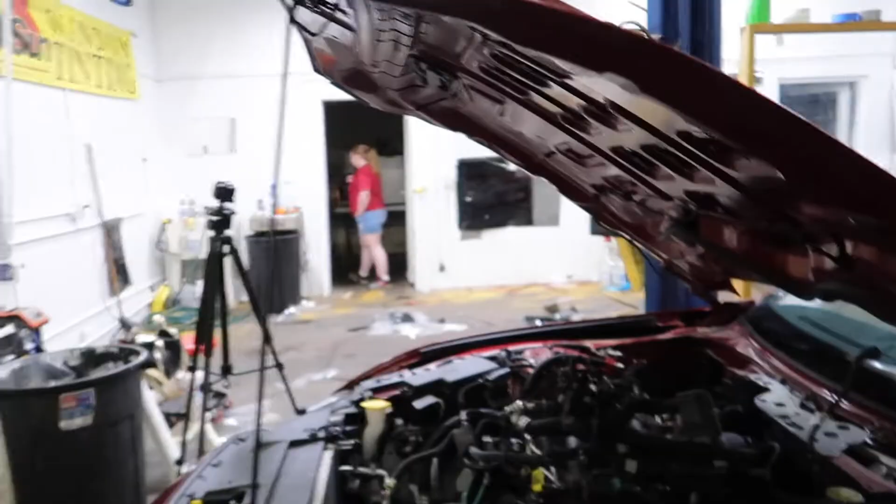Today we are going to be installing a Comp stage 2 cam, oil pump gears, and crank sprocket in this 18 GT. Now this is the same procedure for 2018 to 2020 Mustang GTs. So I've spared you guys the boredom of showing you me ripping everything off the engine, the timing cover, the valve covers, so forth, and I've got down to the nitty-gritty stuff.

So guys, I know I have a Gen 2 timing procedure video with oil pump gears in that, but this is Gen 3, so since I'm doing cams, I'm going to cover the timing procedure, oil pump gears, and cam install in this one video. As I go along, I will be throwing pictures up of torque sequences and things that you need to know, so you can pause the video and reference those pictures from the Ford workshop manual. As you can see, we are ready to start taking the timing chains off.

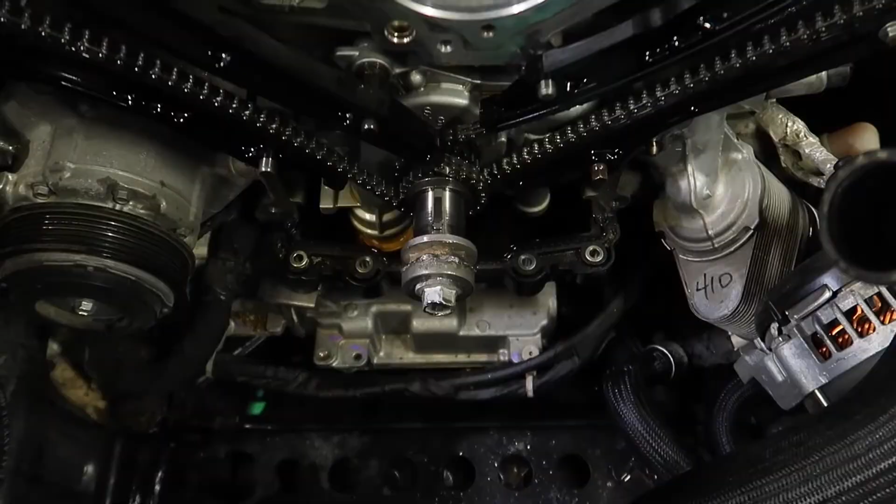Now, timing procedure for a Gen 3 is the exact same as for a Gen 2. As you can see, I've got the crank keyway at 12 o'clock. You want to make sure the R on the passenger side is facing up, because the passenger side is the first timing chain you will take off. So keyway at 12 o'clock, R is straight up. If the R is not straight up, you'll want to rotate the crank one full revolution back to 12 o'clock until you get the R straight up.

So basically, guys, when you have this in the correct position, as you can see, none of the cam lobes are pressing down on any of the valve springs. That ensures that when we take the chain off, nothing's going to bounce around. It's in a neutral position on this side. So we're going to get this tensioner off, get the chains off, and then I will show you what we're going to do to get that side off.

One thing you want to make sure of when you're doing this job is you want a clean surface to put all of your parts that are coming out from the inside of the engine. You do not want to just lay them down and get them dirty. That's very important.

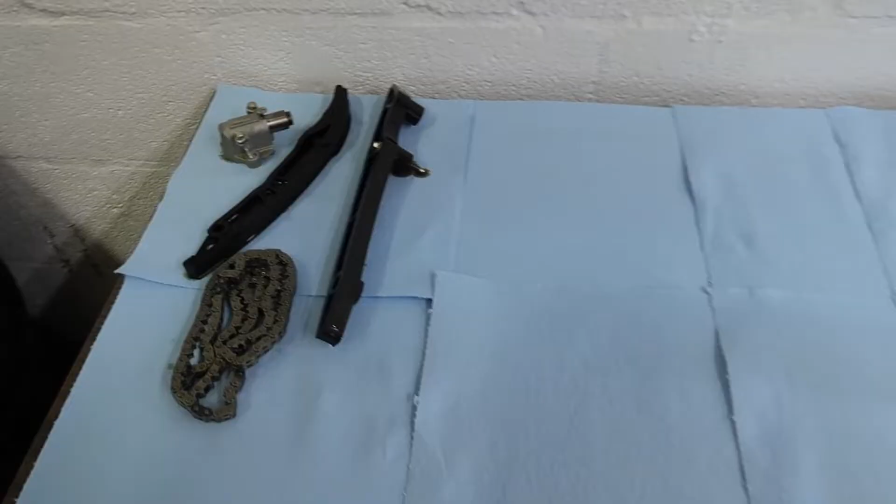As you can see, we've got everything off of this side and we've got it laid out. So when you're facing the car, everything on this side, when I put it on the table, I turn around, everything's on this side, just like I'm sitting in front of the car. You can't really get it backwards, it goes in a certain spot, but I do that so when I'm going back with it, I just grab and go. I don't have to think about it.

Now, right now we've got the keyway at 12 o'clock, so we're going to rotate the crank clockwise to where the keyway is at 5 o'clock. Once you have the keyway at 5 o'clock, you want to look over here, and your L should be, hold on guys, let it focus. Your L should be facing right there, facing away. Now all you're going to do is take the tensioner off, the guides off, and the chain off on this side.

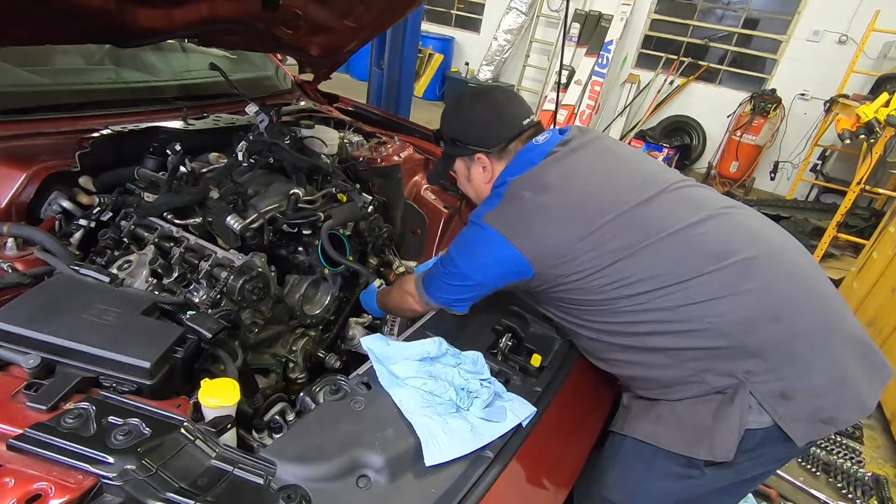Once you get the timing chains off, you'll want to remove the crank sprocket, and in order to get the oil pump off of a Gen 3, you have to lower the oil pan.

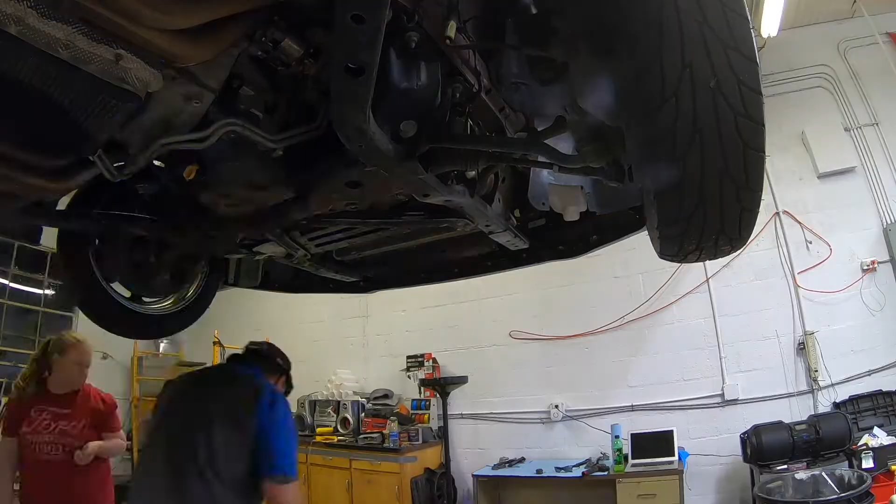Really quick, I just want to show you the troublesome bolts. This bolt right here is sitting right above the steering rack. It can be a pain at times. Take the wiring harness loose, which you have to do anyway to drop the oil pan, pull the little trees out, and then stick the wiring harness up. You can get a wrench up in there, loosen it up, and then walk it out by hand.

And then this one right here, which is hidden right there, you have to put a wrench on that and then get it loose. And I use a stubby ratchet wrench to get it the rest of the way out once I loosen it up.

And then if you take all this cover right here that's on these cars, you can get to this bolt that sits right there pretty easy. But I take the trouble bolts out first, that way the rest of it just goes easy. And of course the front 4 bolts, you remove those when you take the timing cover off. But guys, we're going to get the rest of this pan dropped.

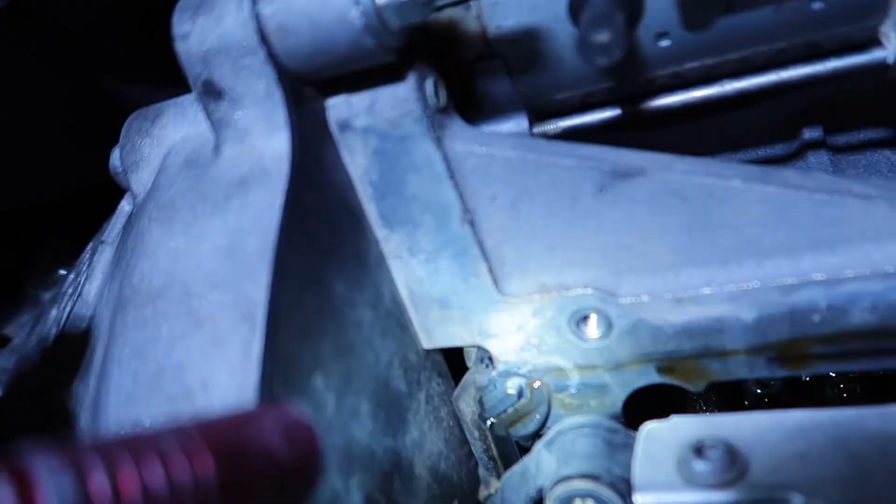Alright, really quick guys, this is what I want to show you back here. That right there is where your silicone's at that I was talking about earlier that you have to remove. You have to be very careful when you're removing that silicone not to let it drop into the oil pan. You have to do that on both sides.

If you see right there, and then you can kind of move the pan back over and you can see it focus. You can see it right there also. And then the silicone on the front, you'll do that when you put the timing cover on. But this right here is what you gotta watch out for.

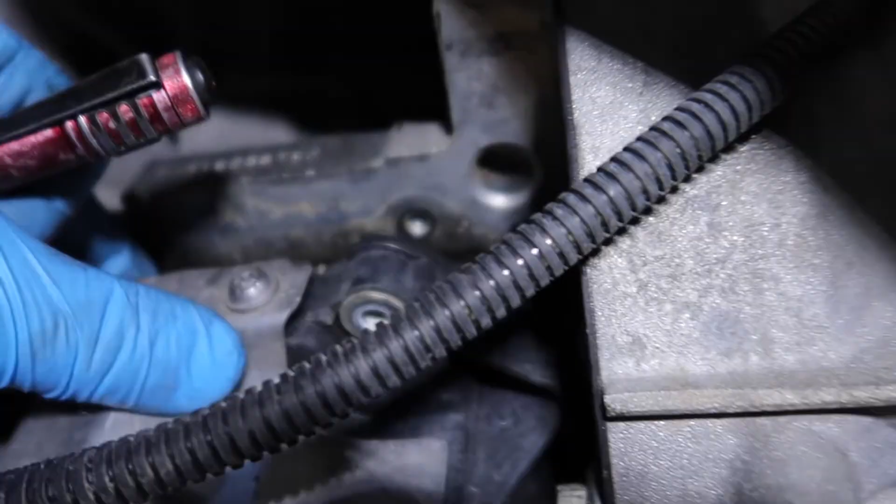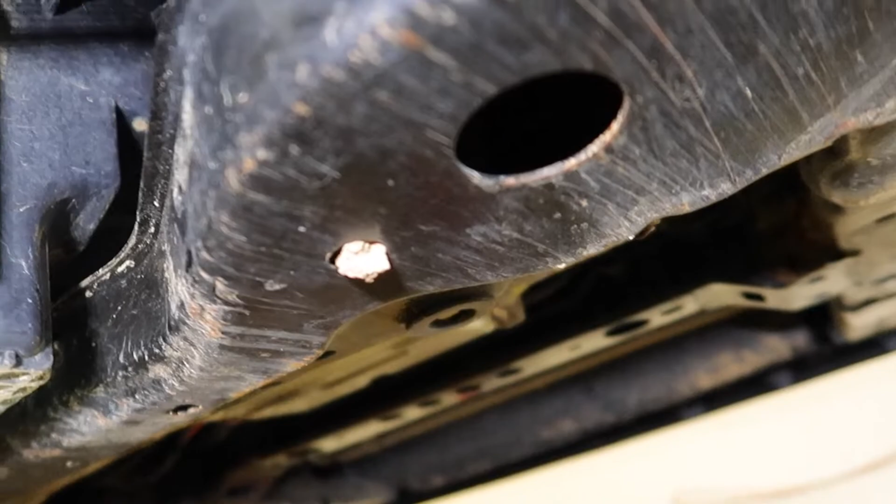Another thing you gotta watch out for, when you pull this down, you gotta make sure that this oil pan gasket stays inside of the oil pan. So you'll just want to take your hand across it and kind of feel and make sure it stays in. But we've got it loose from the oil pump now. We'll lower the car back down and we'll take the oil pump off.

Alright, so as you can see, the oil pan is dropped down far enough to get the pickup tube out of the oil pump. So now all we have to do is remove the 4 bolts to get the oil pump off. So that's what we're going to do right now, guys.

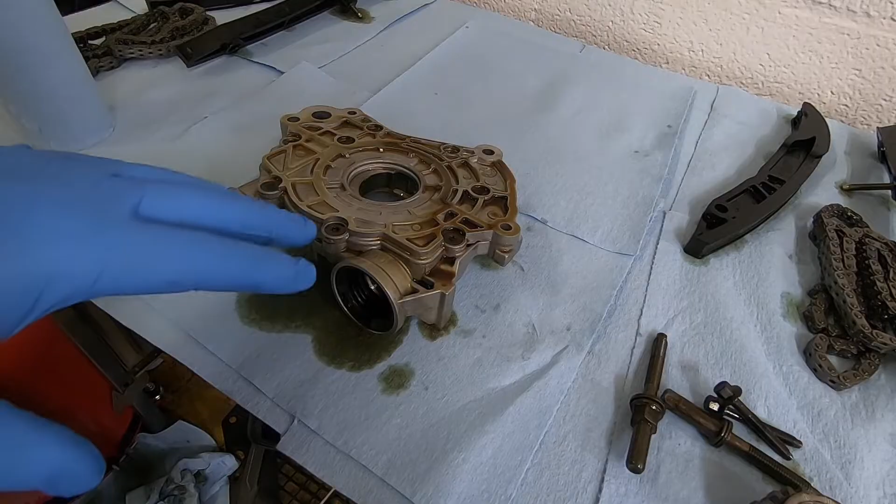Once you have the oil pump out, you want to flip it over. Like I said earlier, you want a clean surface. Put plenty of paper towels on because you do get a little messy with the oil doing this. But you have 8 bolts and they are T30. So you just remove the bolts from the oil pump. Now once I have them all broke loose by hand, I will take a 1/4 inch impact and pull them out.

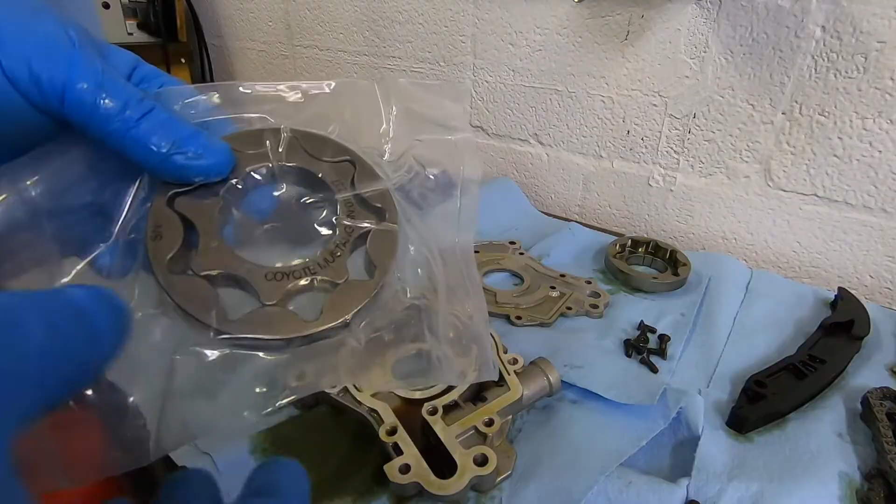Alright guys, so once you have the backing plate off, you have access to the oil pump gears. Remove the center first and then remove the outer part of the gear. So we have the Boundary oil pump gears. I prefer this brand when doing any kind of installations, and one of the reasons is when something is shipped to you, how they ship it says a lot for the company, and they ship it in an airtight package with oil inside of it.

Some of the oil pump gear manufacturers, I'm not gonna name names, will just toss them in a box. They rattle around, and as they rattle around, they can get little nicks on them. Boundary says to install their oil pump gears with the writing facing up as you're installing them. So that's what we're gonna do. So you're going to install the outer gear first.

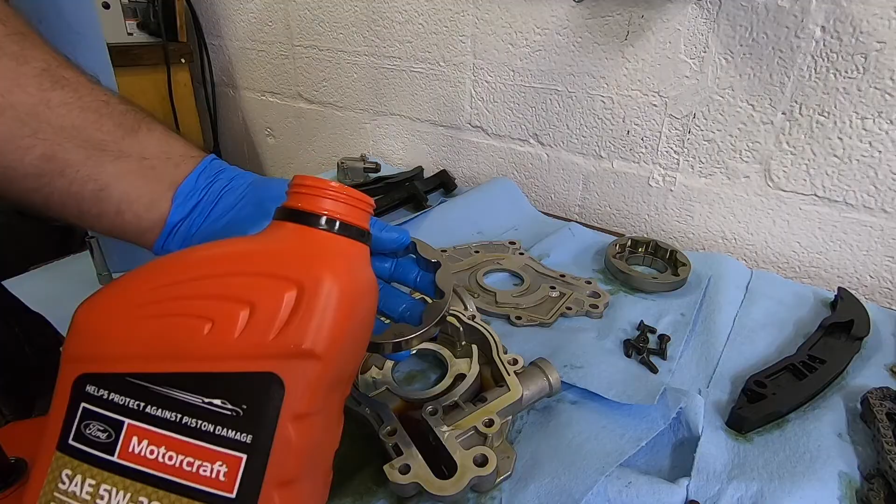Now what I do, guys, this is where it gets a little messy, is I will pour some oil on the gear. You can never have too much oil. I will pour oil on the gear and just a little bit into the pump and then rub it around where I'm going to put the oil pump gears in. You kind of just want to hold it like this and let it drop in. Don't force it in, let it drop in easy, and it should turn very smoothly, just like that, guys.

All right, so then you'll want to put oil on the inner gear. Like I said, just pour oil on it. It's going to get a little messy, but you need plenty of oil, guys. And then you're going to want to set this inside of that gear. Like I said, don't force it. It should go in very easily. Alright, so once that is done, you're going to take the plate and put it right back on.

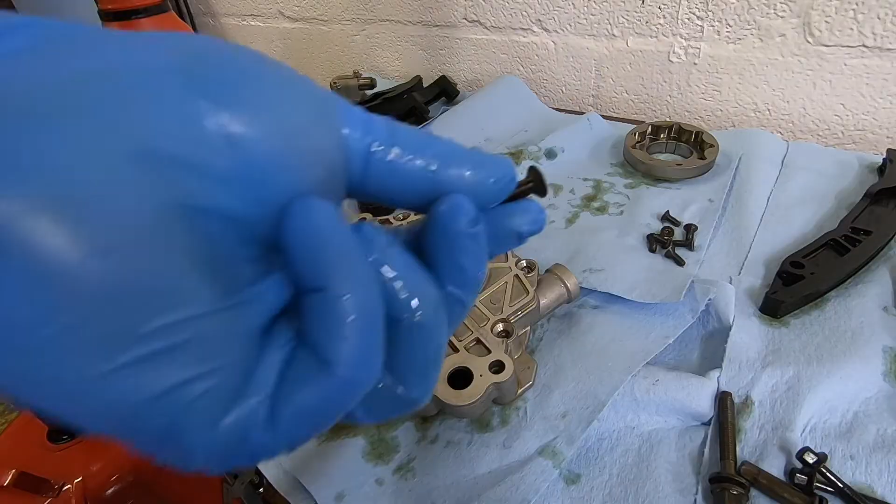Here's what's very important about putting these bolts in. As you can see, these bolts are tapered, and the backing plate is tapered too. If you put one bolt in and tighten it all the way down, you don't give everything time to center. So what I do is put each bolt in by hand and start it. You gotta be very careful, you do not want to cross thread any of these bolts. So start them all by hand and make sure they all thread in nicely.

We're going to start right here, and I'm not going to tighten it down. What I'm doing right now is just bringing it down a little. We're going to let the taper part of the bolts center the backing plate where it needs to be as we start coming down.

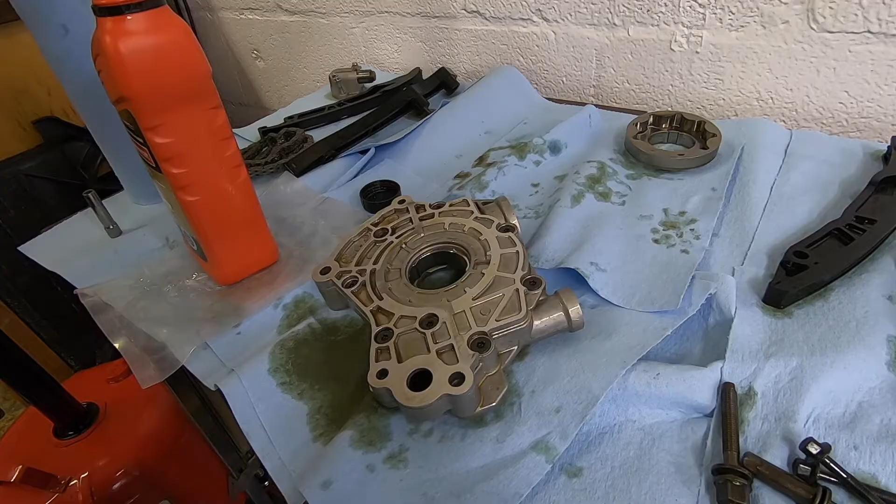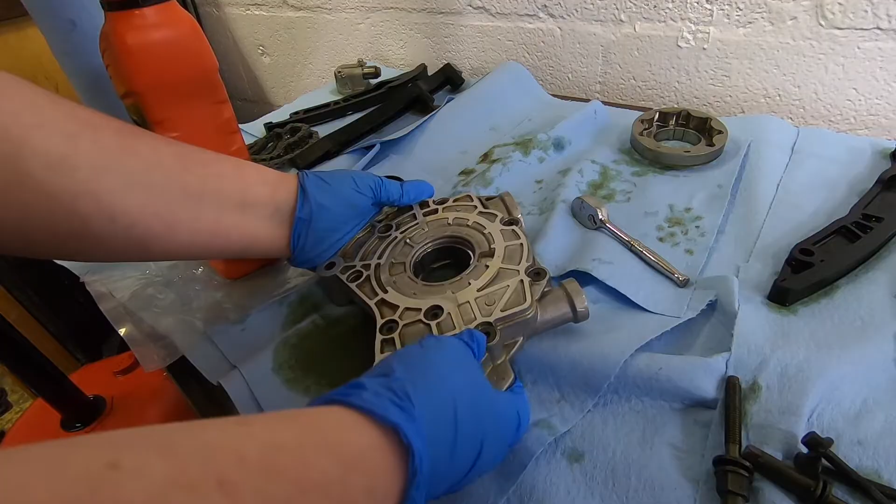Once you get them all snugged up, you'll want to go back and torque them all down to 89 inch-pounds. You might need an assistant to hold the oil pump. I usually like to have somebody hold it, but if you don't have anybody, you can hold it and torque it yourself. It's a lot better if you have somebody help you. So you just torque the oil pump down to 89 inch-pounds.

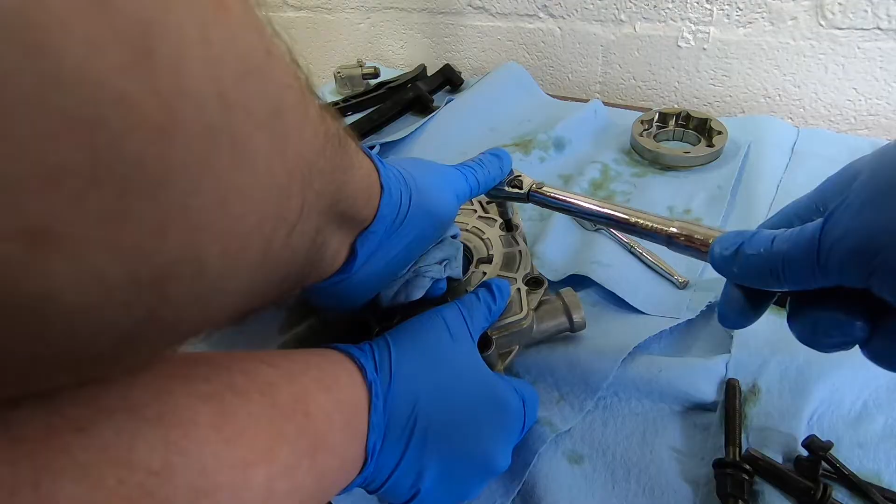As you can see, I'm torquing it down in a star pattern.

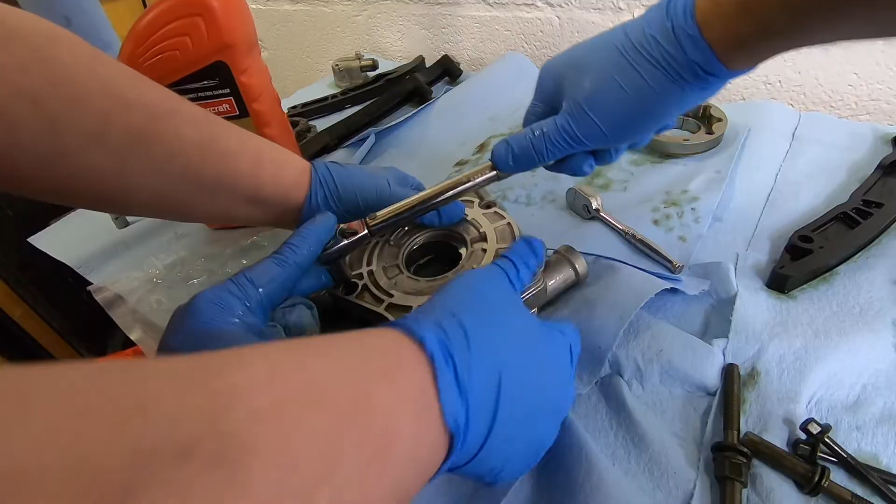Now you just want to go through and make sure you got them all torqued. Once I torque them all down in a star pattern, I'll go back through in order, walking around just to make sure I've got them all torqued and didn't miss one. All right guys, we're good to go.

Now here's the final test. You should be able to take it and rotate it just like that with ease, which as you can see, they're not binding up, everything's rotating very smoothly, and that is what you want.

So now you're going to take it back over and install it onto the car. What you'll want to do when you go onto the crank is line these flat spots with the flat spots on the crank.

So it slides on just like that. All I did was align the slots in the oil pump to match the crank and then slid it right on. Now you'll just install the bolts and torque to sequence.

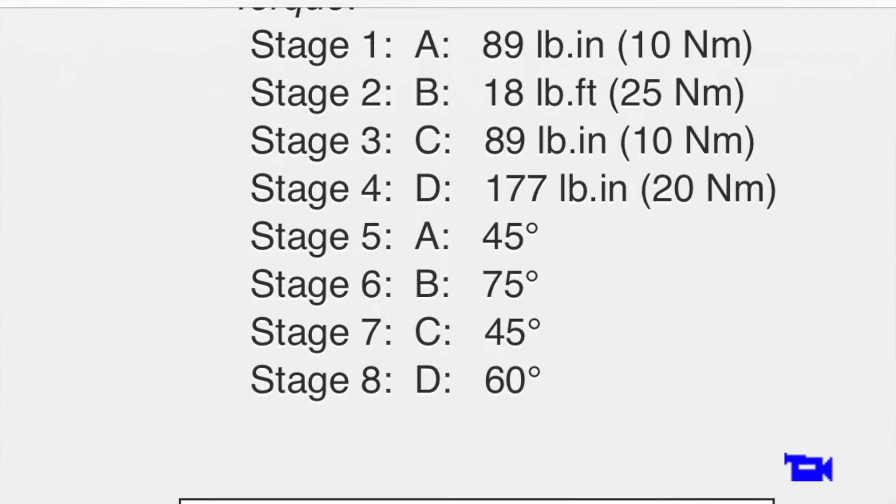I'm going to throw a picture up right here with the torque specs and how to torque it.

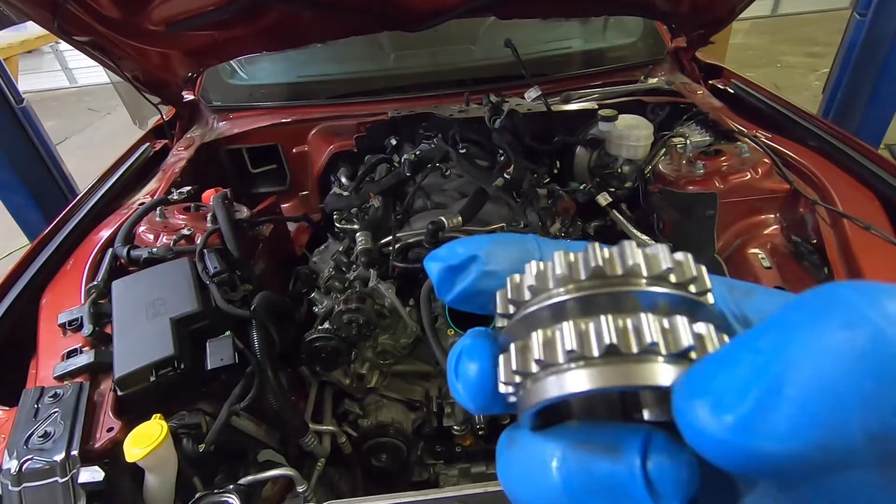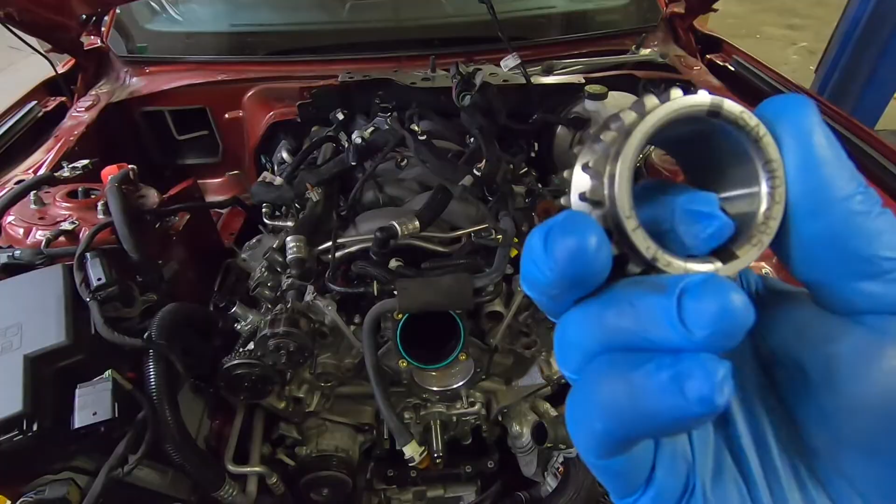On this crank sprocket, you'll want to install it with the lip facing you. Also, another sign of how to install it is the timing mark will be facing you. As you can see, there's no timing mark on that side, but timing mark is on this side. You'll install it with the crank keyway. There's no real way of getting it wrong.

So you'll just rotate it till you find the crank keyway, and sometimes they're tight and sometimes they slide right on like that. If they're tight, don't go taking a hammer or anything else, just give it some persuasion and get it on there, but don't be beating it with the hammer, please.

Once that's on, you're ready to bolt the pan back up. Once we do that, we will be starting on the cam installation, and then we will retime everything.

Here you will want to apply silicone to where you scraped it off before, where I showed you earlier in the video. Just apply silicone back, where the backing plate meets the block and the corners of the oil pan meet up against that.

Really quick before we get started on the cams, the oil pan is bolted back up. Now one thing you've got to make sure of, there's a seal right here for the pickup tube to slide into. You want to make sure you raise the pan evenly and place that just right and push up. You do not need to have it move over here. Gently push up, because if you have it too far over and you push up, you can mess up that seal. So guys, that's an important tip right there.

We are about to get started on the cams. Comp Stage 2 cams use the same procedure as stock cams. You do not have to put springs in, you do not have to limit the phasers. They install just like the factory cams. So we are going to be using the Ford Workshop manual.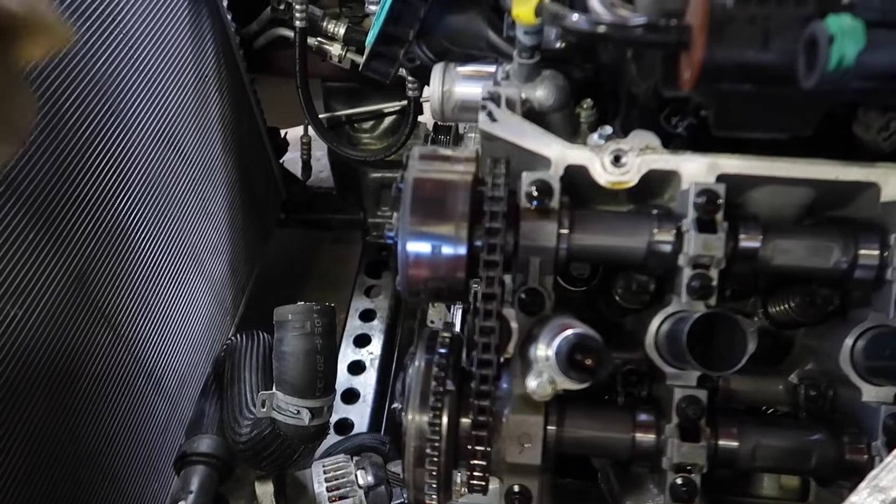Really quick, this is something I do and suggest for everyone: only take apart one side, then put that side back together. Cam caps have an orientation, and you've got to keep them in the exact spot they were. It's very important.

All right guys, first we're going to take these bolts loose. Now if you notice on the cams, there's a squared off spot designed to put a wrench on so you can hold the cams, loosen the bolts, and torque them without the cam moving. One thing you do not want to do is clamp down on it with a pair of pliers or anything like that. Cams do not need to be clamped down on, you use a wrench, and that's what those are made for. Grab hold of it with a wrench and hold it while somebody loosens up these bolts, and you'll do the same when torquing the bolts down.

All right guys, let's get started. We're going to remove the phasers first. You'll want to remove the bolts. Now you are going to replace these bolts, they're torque to yield, and per the factory workshop manual they need to be replaced.

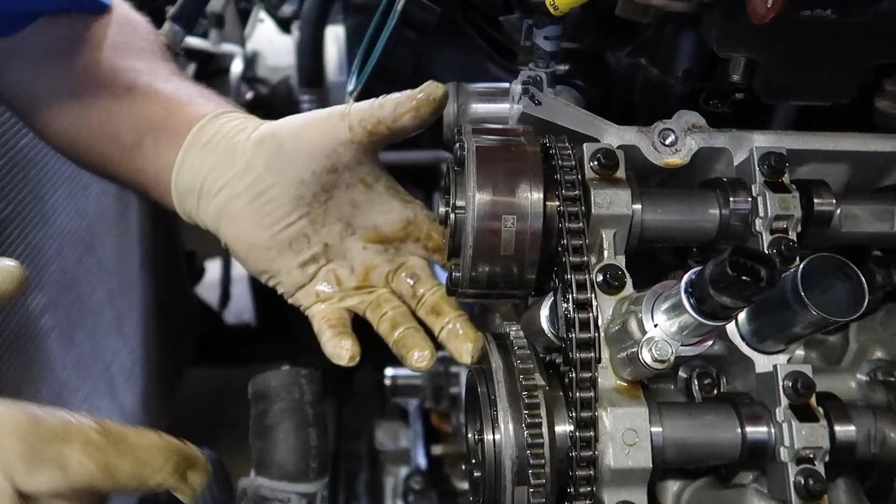Once you remove the bolts, you're going to want to slide this forward just a little, the book says 2 millimeters. All you want to do is get this down and then rotate it 45 degrees.

We're going to take the front cap off first, and then we will remove the rest of them. There is no sequence to removing them per Ford Workshop, but there is a sequence to torquing them. All right guys, so we're going to remove this and then the rest of the cam caps. Very important, you want to keep these in order. This is the intake cam, this is the exhaust cam, and as you see on the front right here, these are made differently.

Somebody asked me, could you get the intake cam and the exhaust mixed up? There is no way to do that. On the Gen 3s, they use totally different phasers, so there's no way to do it wrong. So anyway guys, we're going to remove the front cam cap and the rest of the cam caps, put everything in order, and then remove the cams.

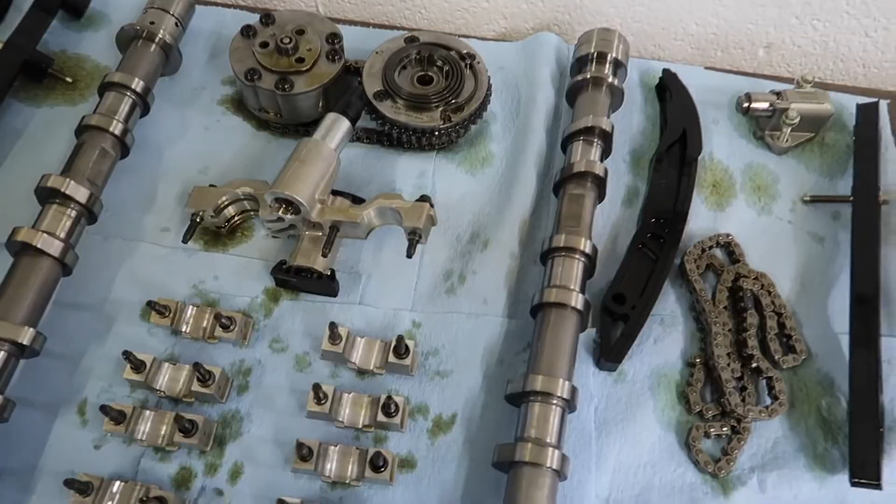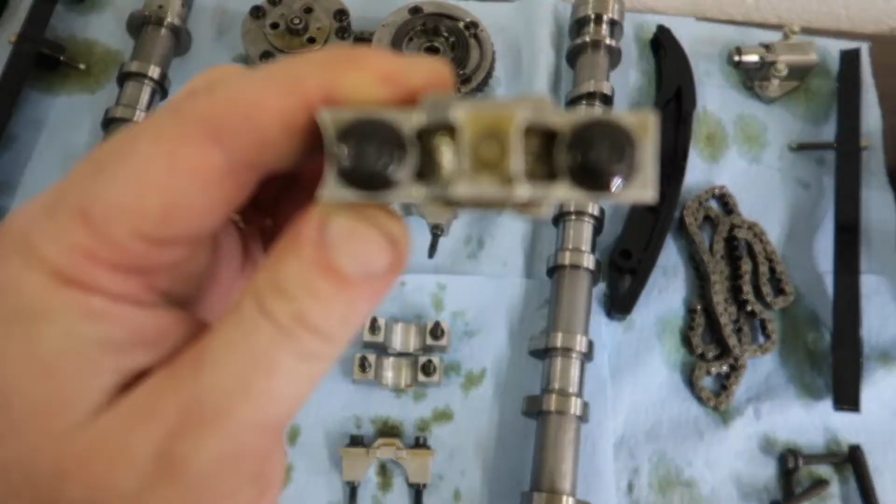Alright, once you have the cams out, as you can see, I've laid them all in order. If you were to put one down and forget where it goes, they are numbered. You see right there it has a 7, with an arrow pointing forward. Starting on the exhaust side, it's 1, 2, 3, 4, 5, 6, 7, 8, 9, 10. So if I was to pick up this one right here, it would have a 10 on it, which it does, and it has an arrow pointing forward, so it would go in as the very last intake cam with the arrow facing toward the front of the engine.

So guys, right now we're going to get the cams unboxed. I'm going to do one cam at a time. I'll put the cam in, then put all the cam caps back and torque everything to spec. Alright, so here are the cams.

Really quick, I want to show you right here, it says right intake, right exhaust, left intake, left exhaust. The only thing that got me at first, you see where it says Focus, left exhaust, on there. It says that on all the boxes, but the specs are different on the boxes, and it actually has RI, LI, LE, RE, so you cannot get them wrong.

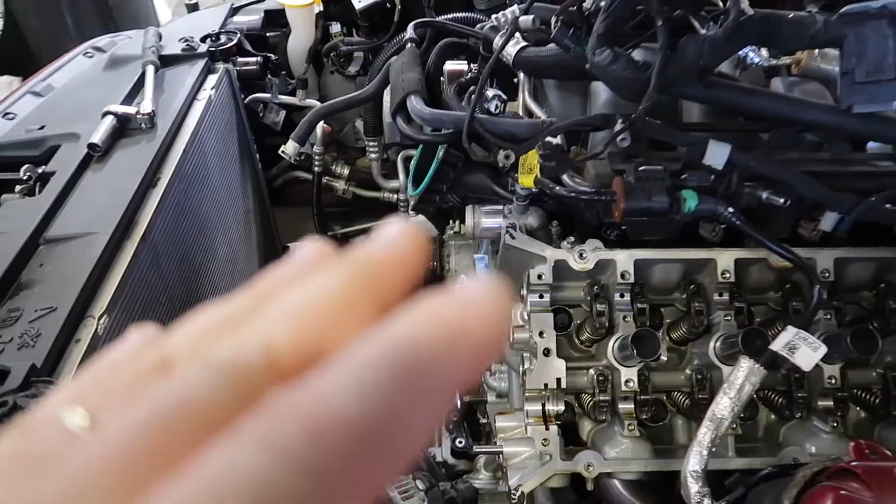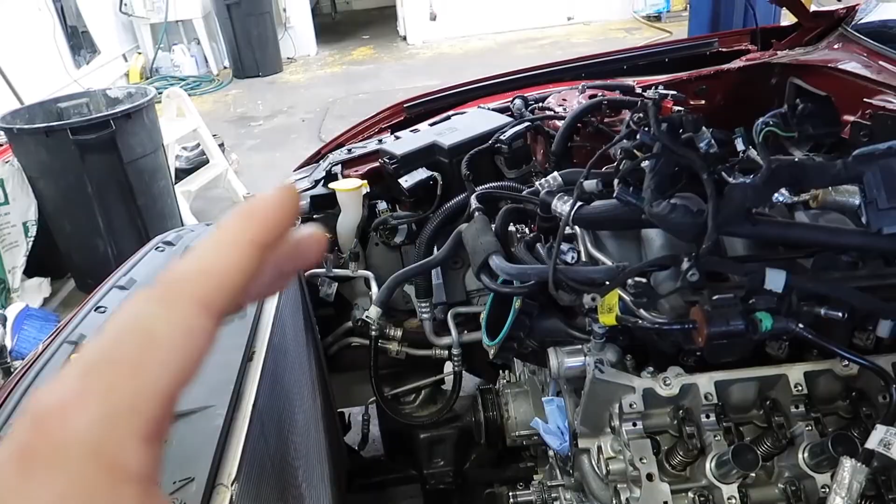Alright guys, I'm going to throw up a picture of the torque sequence for the cams and the placement, and then once the cams are in place and torqued down, I will show you on the front of the cams how everything needs to look before you put the phasers back on. So we're going to go ahead and install the cams now.

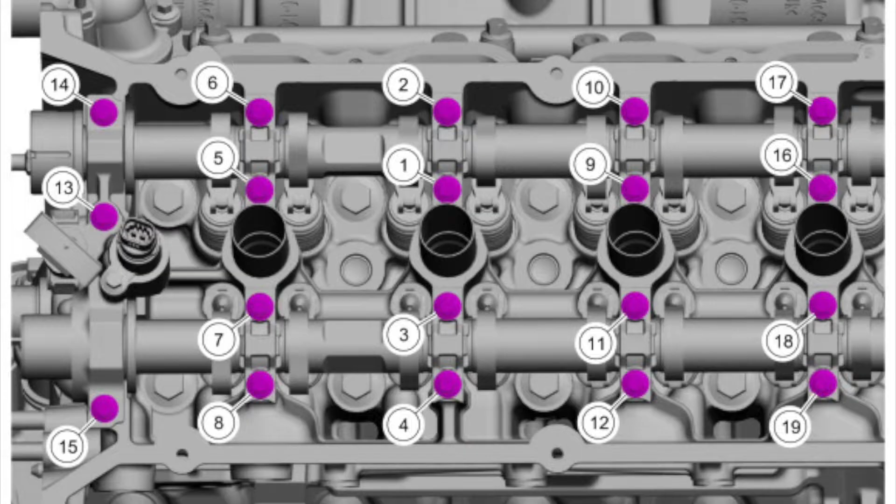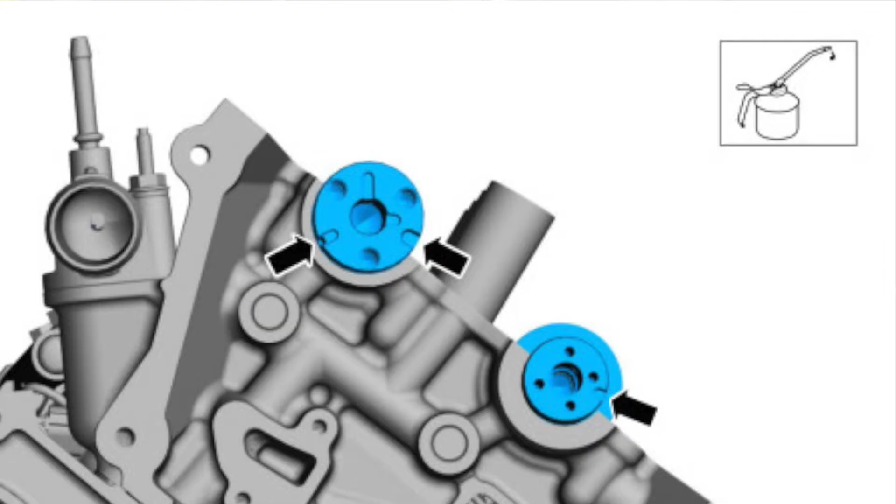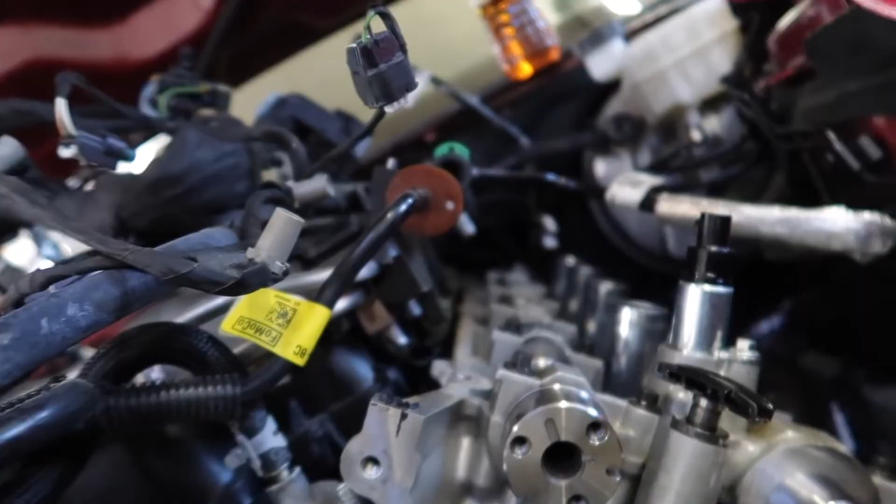Okay guys, as you can tell in the picture, there is a certain way for these cams to set. It clearly states it in the picture. As you can see, we've got exactly where it is. Now if you see these slots, these right here, this is where these right in here are going to set.

Alright guys, one other thing I want to mention before we put the phasers on really quick. There's a filter in there, let me shine the light up in there. Comp Cams does not send the filter, so you'll want to take the filter out of your old cam. If it looks good and clean, you can reuse it. If it doesn't, put a new one in. It goes in there just like that. You will have to put that in there. That's very important, you don't want to leave that out.

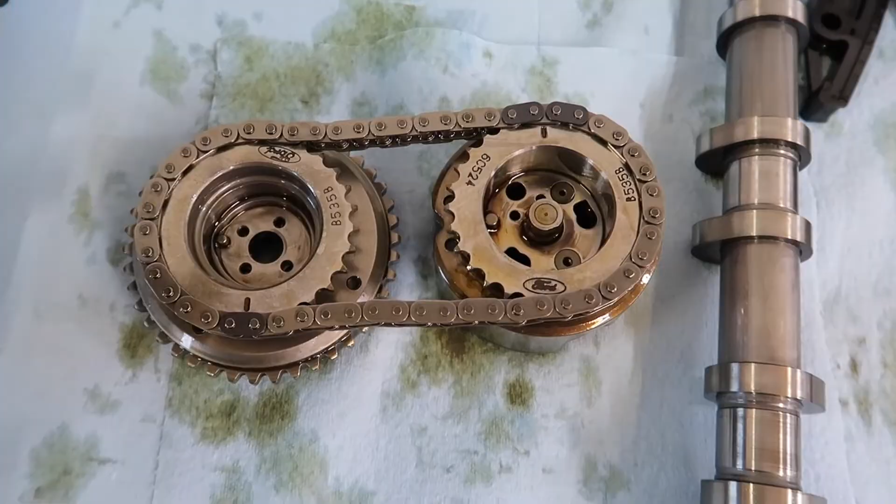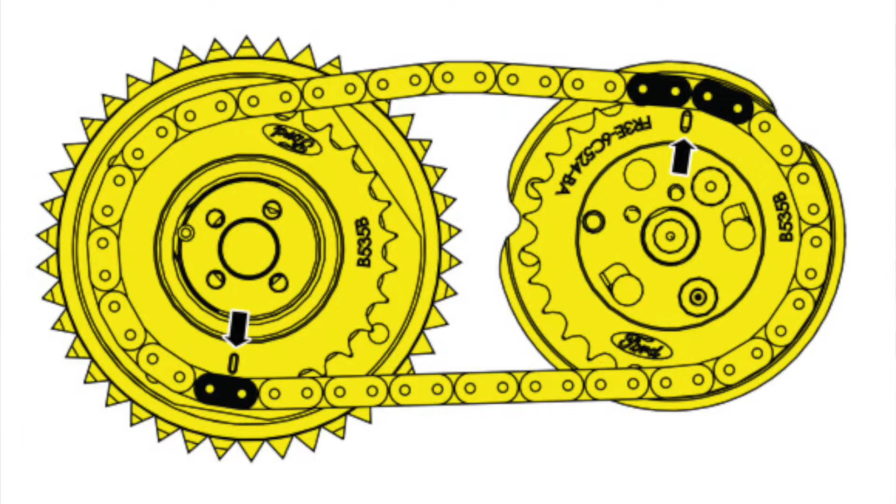Right here, I'm going to go over this really quick on how to time the phasers together with the secondary timing chain. I'm going to throw up a picture right here, this is out of the workshop manual. As you can see, the intake phaser has the timing mark sitting in between the two painted links, and the exhaust has the timing mark exactly on the painted link on the other one. Right here guys, as you can see, we've got it set up just like the picture, so we are good to go as far as that goes.

Now you'll want, when you're installing these, to keep them tight. You'll want to allow them not to move, not to jump teeth, and that's very, very important. You do not want these to jump teeth while you're installing them.

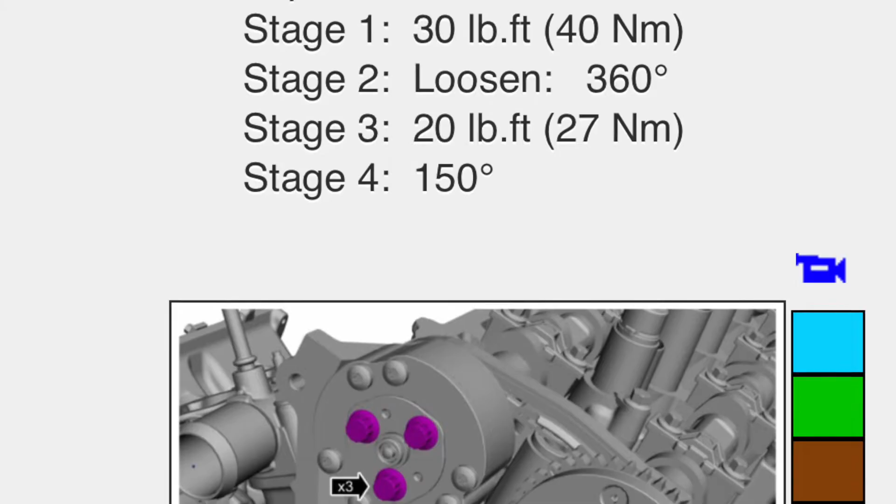Alright, so on the driver's side, we got the cams installed. We've got the phasers on and torqued down, and we got the cams timed together correctly. Now it's time to do the passenger side.

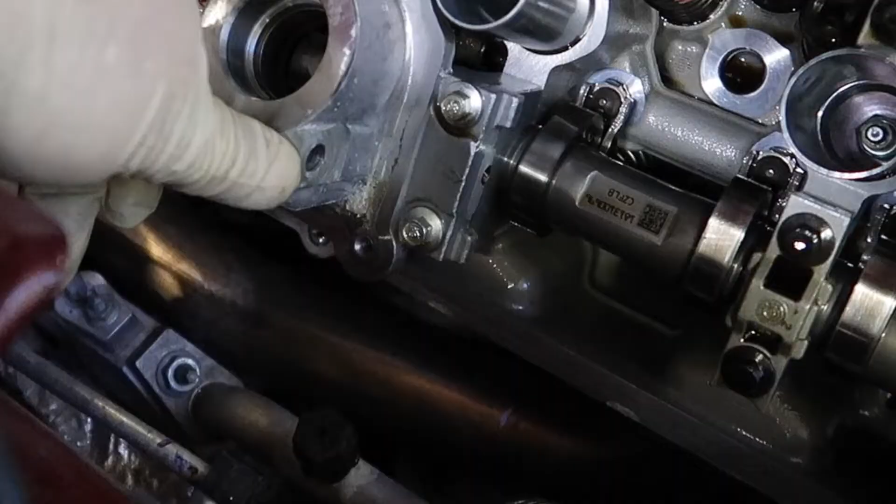Now, one thing I do want to show you guys is different on this side. This is your base for your direct injection pump. But that's the only thing different on this side, and that takes the place of two of your cam caps right here, with this base right here. So guys, we're gonna get this side taken off and get the cams installed, and then we'll pick it back up, and I will show you guys the front here of how the cams sit down in there and where they should be sitting at whenever you bolt the cam caps down to install the phasers on this side.

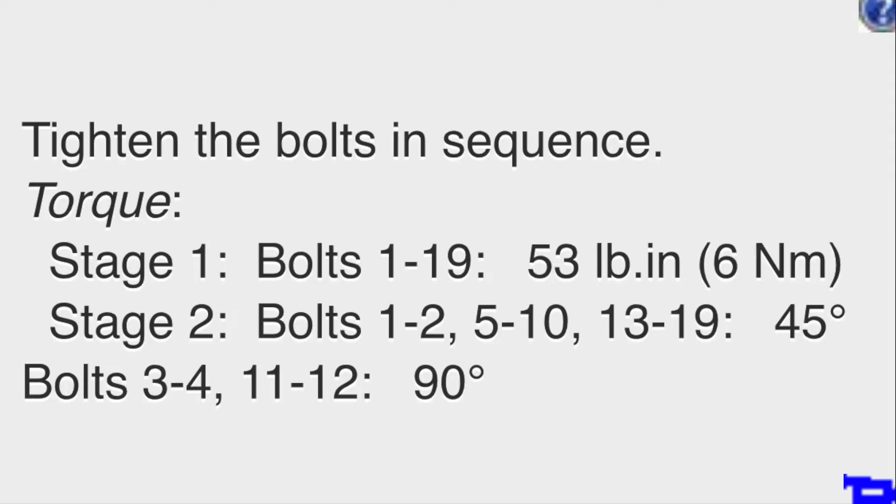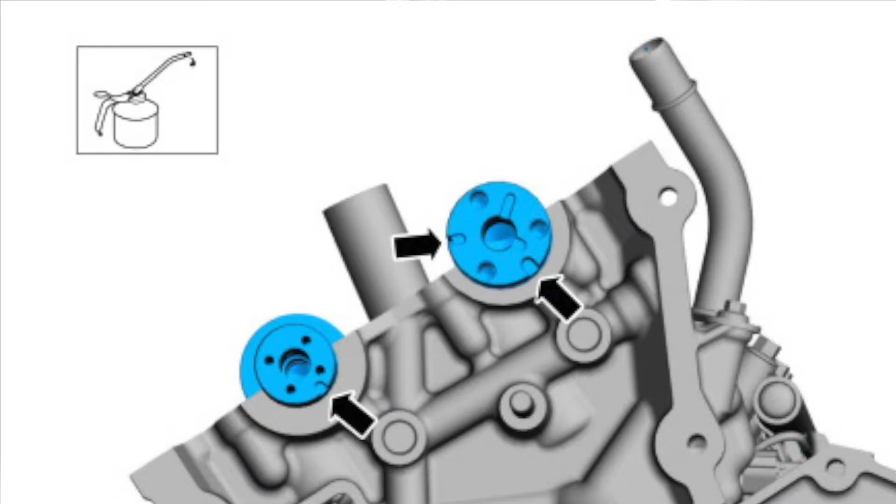Alright, so we got the cams in on this side. Everything is torqued down, and right here is where the cams should stay. I will throw a picture up to show you also the right hand side cam. So just make sure as you're putting them in that they look like this right here. And like I said, you can always go back to the video and freeze the picture also, because the picture has little lines drawn on that as well.

But once it's in, don't forget that filter. It goes inside the intake cam, and it's only on the intake cam. You do not have one on the exhaust cam, only on the intake cam. Do not forget that filter.

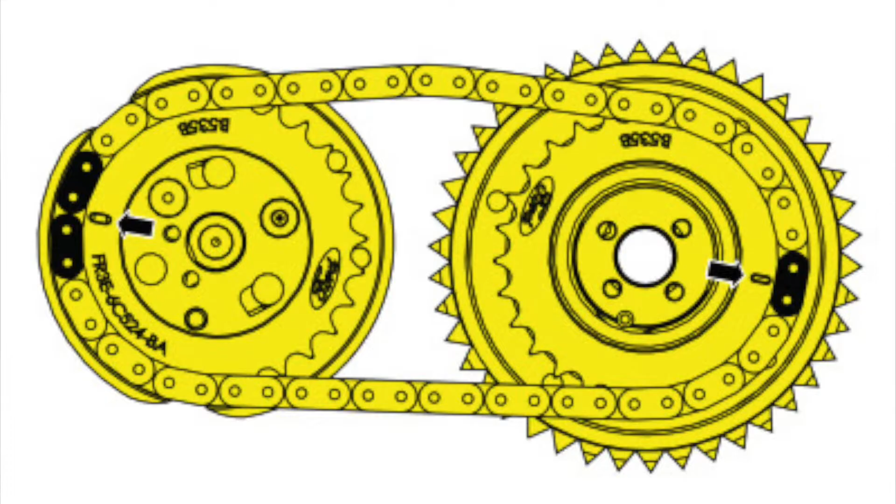Alright, so here is the cam phasers for the right hand side, the passenger side. I'll throw a picture up right here so you can reference it. It's just like the other one, except the cam phaser lines are in a different spot, but it's just like the other side. The timing mark on the intake goes between the two color links, and the timing mark on the exhaust phaser goes on the one timing link.

Just remember, 2 intake, 1 exhaust, and you'll be fine. Alright guys, really quick, I know I went over some on the other side. I just want to go over this again because this is setting in a different spot on this side. But this right here and this right here, these little D notches, D slots, whatever you want to call them, they're set one's right here, one's right here on this side. And just like the other side, you want to line that up with that one and that up with that one. This is exhaust, this is intake.

Take your time, be careful. Remember, get them in the right spot, get everything on, get everything pushed up by hand, then put your bolts in and tighten and torque everything down. Guys, just take your time and everything will go good. Alright, so we got this side all put together, timed and torqued. Everything is great on this side. We are ready to start the timing procedure.

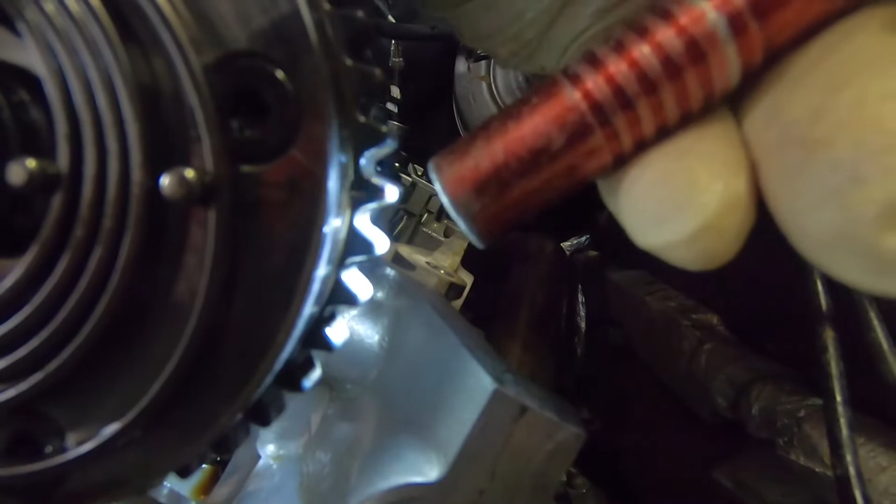Now, the crank is already at 5 o'clock where we left it. The L is facing exactly where it was when we took everything apart. Just real quick, you see that line right there? If you see it, it corresponds with the L. That's where you want to put your painted link on your chain. And then down here, guys, you want to put your painted link on the chain where that mark is. As long as you have that color link right there and then a color link right there, it will be in time.

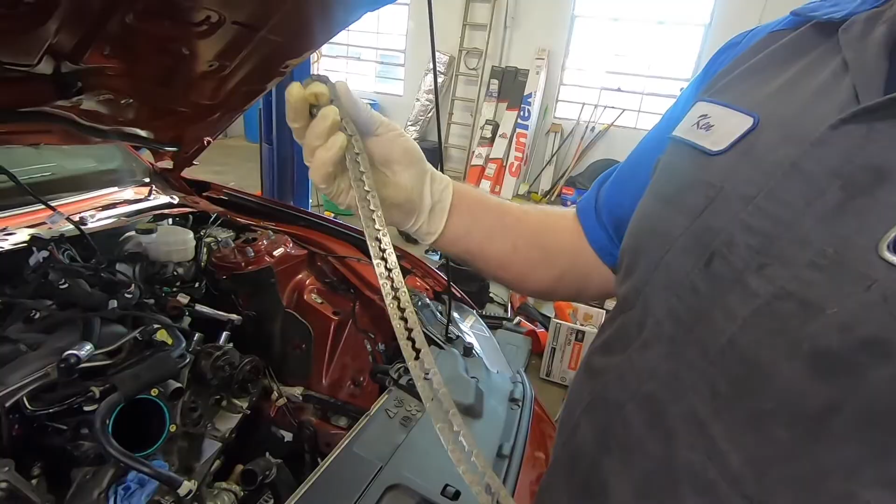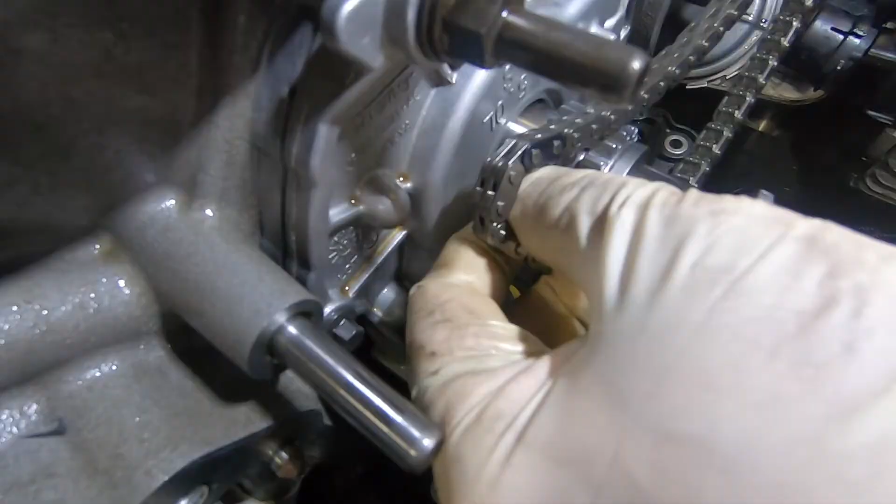Alright guys, here is the timing marks I was telling you about. One right here, one right here. One goes up on the L, one goes down here on the dot. Pretty straightforward, you cannot get it wrong. Alright, so we're gonna put the chain on right here. You can start up top, you can start on the bottom. I like to start on the bottom, and I'm on the back side because the driver's side goes on the back side. So we got that, and there we go.

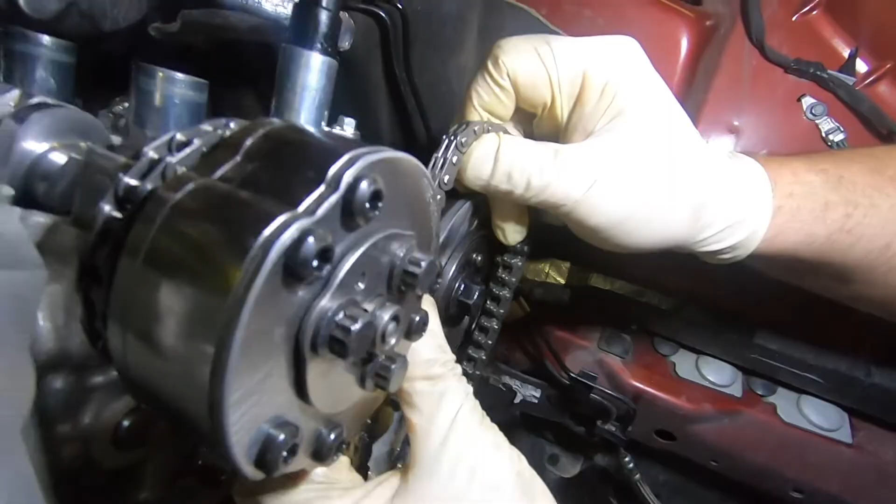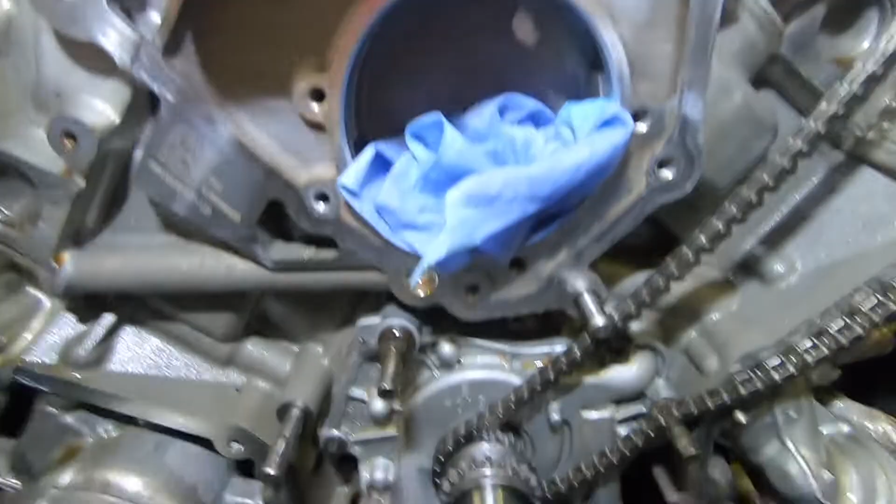Our color link on the sprocket is lined up with our color link on the chain. And then we're going to go up here, guys, and we're going to line up the color link right up here. Alright, so there we go. So if you look at it, you can see the line, there's the L. You can see the indentation on the sprocket there, and it lines up with the color link. And then down here you can see the colored spot on the sprocket, and the color link lines up perfect. So now you want to put your guides on.

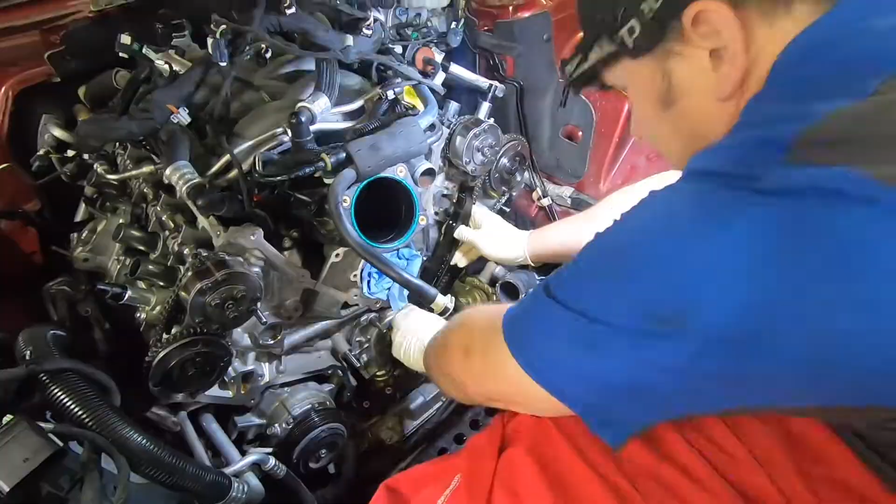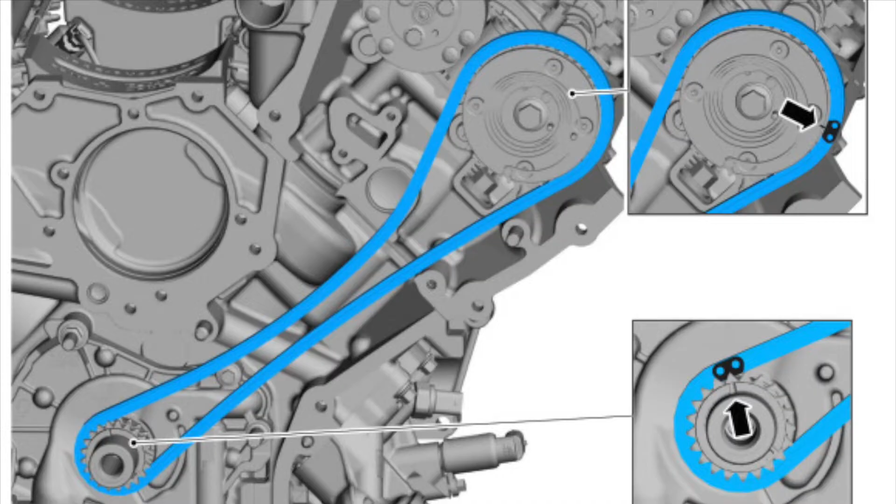Alright, so once you have your guides on, your tensioner on, and bolted up, and then you pull the pin out to release the tensioner, you are going to make sure that your timing marks, the indentation on the sprocket and the timing mark on the sprocket and the color link on the chain, are together. And then down here, if you look at it, the color link is lined up with the timing mark on the crank sprocket. So this side is completely in time.

So as long as you have that right, you cannot be wrong. Just like the secondary chains, as long as you have the color links lined up correctly, the cams are timed together. If you have everything lined up correctly here, this is timed together, you cannot be wrong. Now here's the part that you need to pay close attention to. In order to time this side, the passenger side, we have to rotate the crank 1 full revolution back to 5 o'clock. Then we keep rotating it clockwise to 12 o'clock.

So again, it's at 5 o'clock now. We're going to go clockwise 1 full revolution back to 5 o'clock with the crank keyway. And then we're going to go from there to 12 o'clock. That will put everything back where the engine will be timed side to side. So guys, that's what we're going to do now. So once you go 1 full revolution back to 5 o'clock, then you come back around to 12 o'clock clockwise. You are now ready to put the chain on.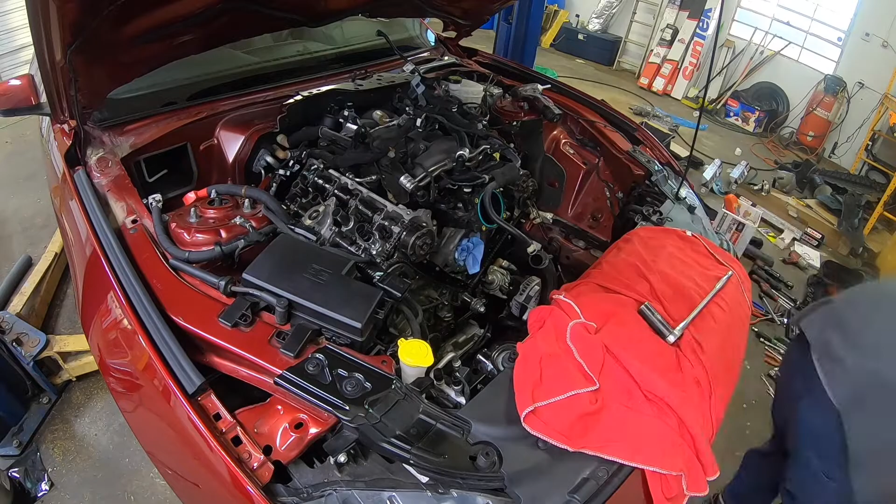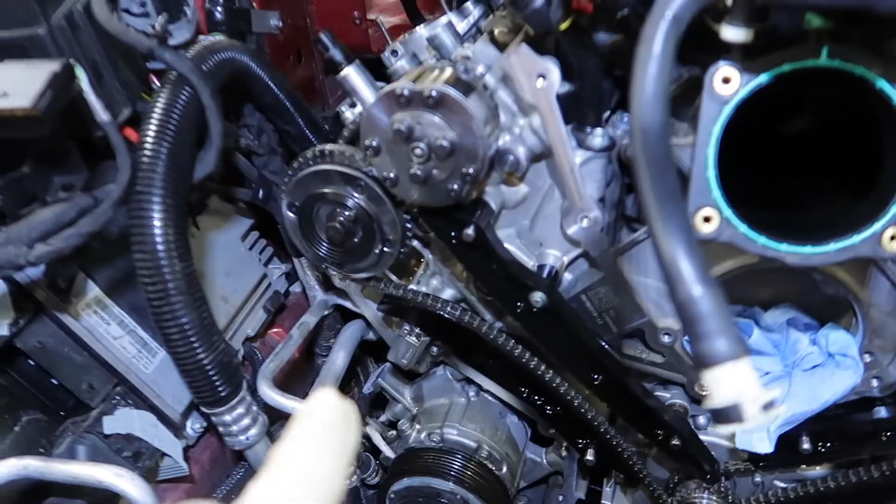Right here. And like I said, I use a mirror to get this where it needs to be. So we're going to time this side right now. So we got this side timed. I got the tensioner on and everything is good to go. I'm going to show you guys.

Like I said, you want to put it right there, as you can see. You can see the timing mark on the sprocket matches the color link. And then down here, let me shine some light on there for you guys. You can see that the color link matches the timing mark on the crank sprocket. So everything is good to go.

One thing I want to point out, guys, I've had people email me watching my Gen 2 video and so forth, and they'll say, well, once we rotate the engine and we rotate it back around, the color marks are not on the L and down here. It takes several revolutions for those color links to match back up. That doesn't mean the engine's not in time.

So if you want to check, if you go on the mark on the L, do not count the link that is on the mark on the L. You want to start at the next link. Then you want to count links all the way down to the crank sprocket, but you want to stop at the link before the link that's on the mark on the crank sprocket. There should be 31 links between timing marks.

So starting here, going to count 1, go all the way down there. There should be 31 links between the 2 timing marks. You can count that and verify that your engine is still in time. Now what I like to do once I get the engine completely timed is I like to go around 2 full crank revolutions. That sends the engine all the way back around and puts it back, and then I will count my links.

Also, when I do that, I verify by turning it over by hand that I did nothing wrong. Because if you did nothing wrong, the engine should turn over. It should not get stuck. If the engine gets stuck, if you did something wrong, you'd rather be turning it over by hand than the starter turning it over. So I always turn it over 2 revolutions on the crank to make sure that nothing's in contact, everything's turning the way it should, and all is good to go.

To make it easier on you, I do suggest removing these spark plugs, because it will make your life a lot easier and you won't hate yourself as much. But you can still do it with the plugs in. You're just fighting compression at that point. Nothing wrong with that. But if it's out of time, you will know. You can be out of time 1 link. I've had somebody contact me, they were out of time by 1 link and were throwing cam and crank correlation codes. So guys, you got to watch out.

All right, guys, so we got everything put back together. We got Nick. This is his wife's car over there. His car, we're going to fire this thing up. We got everything primed up. We got oil in it. We got coolant in it. We got everything good to go. So we're ready to fire this thing up. This thing is loud, guys. Forewarned, it is loud. Go ahead.

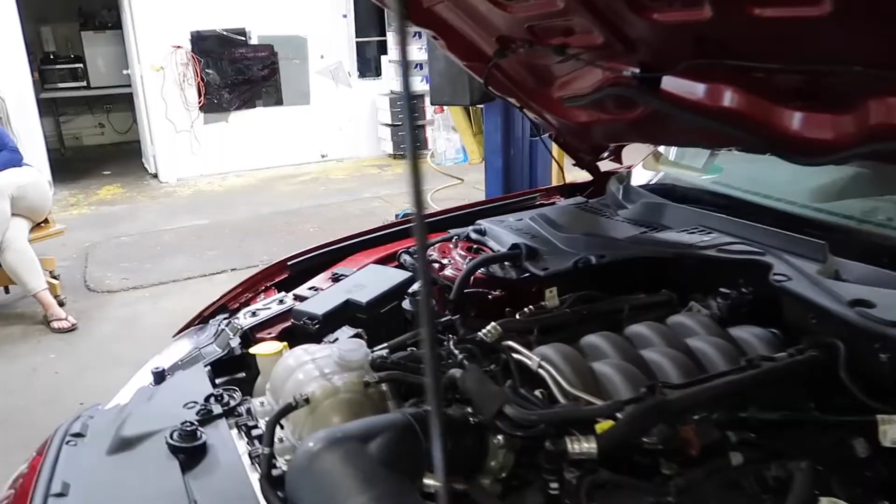Sounds good. Sounds good up here. Hey, no ticking, no knocking. That's good, right? Everything good, good. Oil pressure look good? Okay, good.

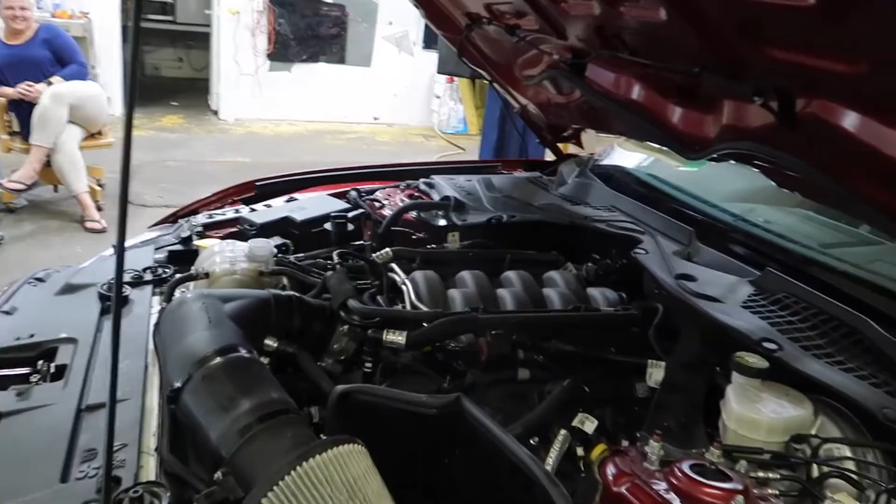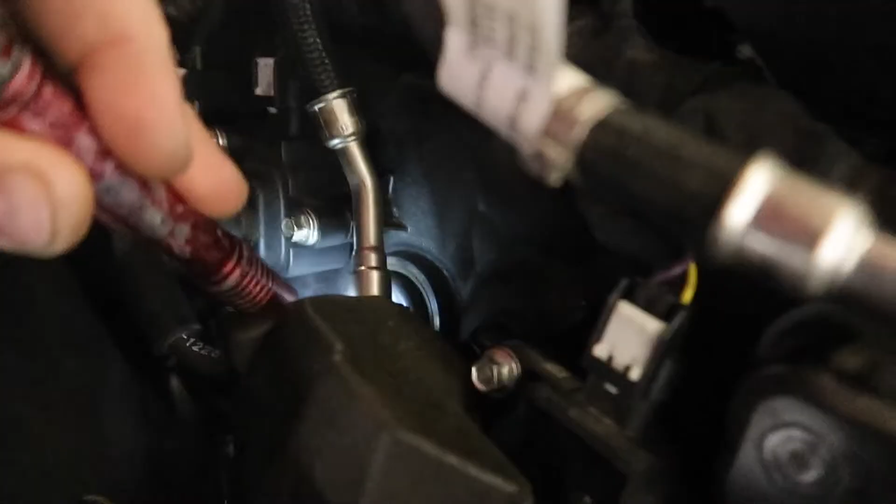Guys, I spilled oil on the headers when I was putting the cams in, so it's gonna have to burn off. Just looking at everything, make sure I ain't got no fuel leaks. That's the biggest thing about messing with this pump. I don't want any fuel leaks or anything like that. Just make sure. Go back here, we got the line on back here. I don't see nothing squirting out, so that's a good thing. Everything looks good, everything sounds good.

We gotta let it come up to temperature, let it burn, fill it up with coolant, and then Rob said you could actually drive this around, right? Yeah, I got the email. Okay, good to go. Yeah, no wide open. Guys, this car is tuned by none other than Rob Shoemaker with Palm Beach Dyno. So he's got the tune in, everything's looking good.

Lambda's looking good. Oil pressure's looking beautiful. Everything is looking good. It's on the E85. Short-term fuel trim is looking good. These things actually have a little lope. Very little. Yeah, you can tell it a little bit. Oh yeah, you can tell a little bit.

You've got a Suncoast torque converter, PMAS air intake, E85, long tubes, MBRP catback, race catback. Yeah, it's got green cats on it also. Got green cats on it? Only weight reduction is the back seats out. This is a 401A package, so it's heavy, especially with me in it, you know. Yeah. It moves. What's your best time in it so far?

We ran at Huntsville, Alabama, ran a 7.33. I think it was around 2000 DA. Yeah. That's eighth mile. Quarter mile, we ran 11.4 at NMRA in Bowling Green. It was like 90 degrees when you was there. Yeah, it was hot that day. That was high DA. Yeah, that was before the converter and the True Street trim. We still had both leather seats in and everything. All we had out was the back seat. About like a 6 now. I'm interested to see what it's going to run with the cams now. Oh, yeah. Man, this thing sounds good.

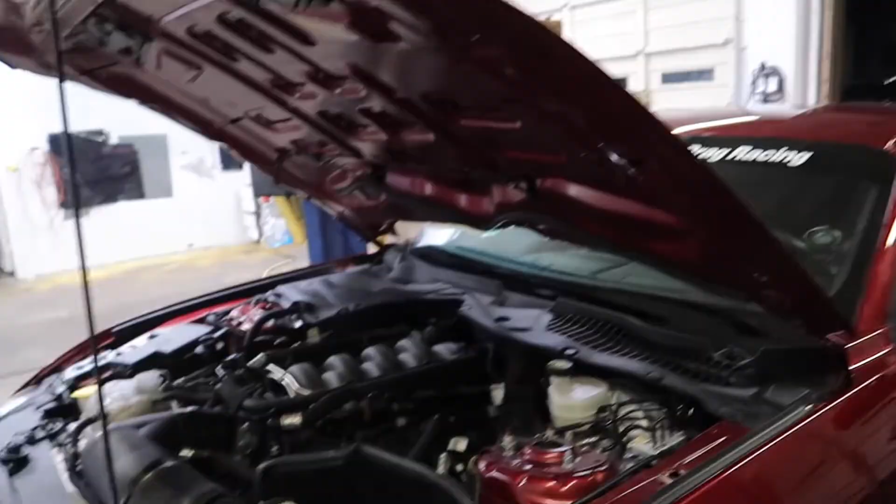But we're gonna let this thing come up to temperature, get the coolant topped off, and then we're gonna drive the car around, make sure everything is good. And then hopefully I'll see this car back Friday at Jackson Dragway. Also, we loaded the tune in for this car with the cams. Yeah, this is Rob Shoemaker's startup tune and drive around tune for the cams. So she's running really good. Yeah, I got no codes yet, nothing like that. I'm waiting for it to throw something. No, it ain't thrown nothing. Yep, we're good to go.